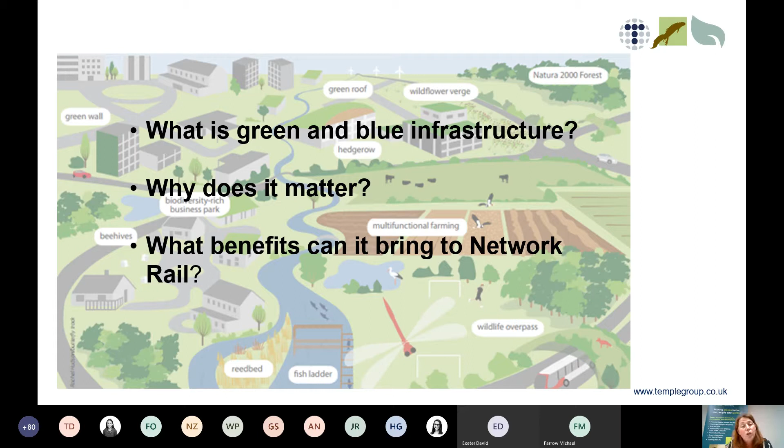So what is green and blue infrastructure? When most people think of green and blue infrastructure, they probably think of green roofs or green walls like this one at Birmingham New Street Station. And they're great, but they're not the whole picture. Green and blue infrastructure does include natural places such as parks, woodlands and rivers, and also man-made aspects of the environment, canals, water treatment facilities, green roofs and green bridges and things like that as well. It's all of these things together.

But it has to be said that green infrastructure is not simply an alternative description for conventional open space. The real kicker for it is that it's a network of multifunctional green and blue spaces and features that deliver environmental and quality of life benefits for communities. And that's the ultimate key point, and that's where I actually find the concept really exciting, is in that it's multifunctional and it's not just focusing on one thing. You might be expecting to hear me talk a lot about biodiversity today. I'm not going to, because it's that multifunctional aspect that crosses over everything and every aspect of life and our environment that makes it so important.

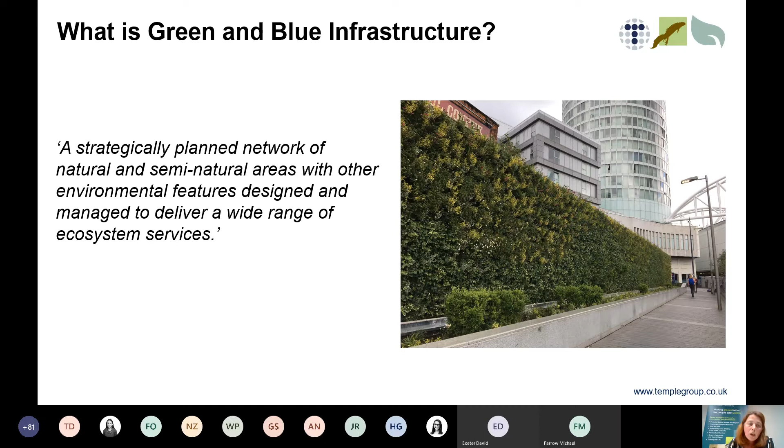So where does green and blue infrastructure fit within the scope of biodiversity as a whole? A lot of these concepts you'll have heard a bit about in the last 2 days, and I know you've got talks on biodiversity net gain, and ecosystem services and natural capital coming up. Those talks tomorrow and on Friday will delve into this in a lot more detail. But I think it's important that we talk about how green and blue infrastructure can support these ideals.

As we touched on the definition in the previous slide, green and blue infrastructure involves creating and managing habitats to support natural processes. It should be aligned with and support and enhance those processes. Now, if we look at the top of the triangle here, ecosystem services are basically the benefits that are derived from those natural processes. And when we're trying to look at how we quantify those benefits, it's very difficult to come up with ways of necessarily quantifying some of the benefits that we gain from the natural world. We know that all of these things, from pollination and food supplies, all take part in it, but how do we quantify that?

And that's where natural capital comes in. Natural capital is that framework for recognising and valuing the natural processes so that their importance to the economy and society is recognised and can be quantified and brought into basically your spreadsheet at the end of the day. Where do they fit? What benefits? Can we actually put a number on this? Natural capital enables the benefits of green and blue infrastructure and ecosystem services to be quantified and therefore assessed during your decision-making process. That's what allows us to actually take forward green and blue infrastructure and incorporate them into your KPIs or your sustainable development principles and see how it can help you achieve your targets as a whole.

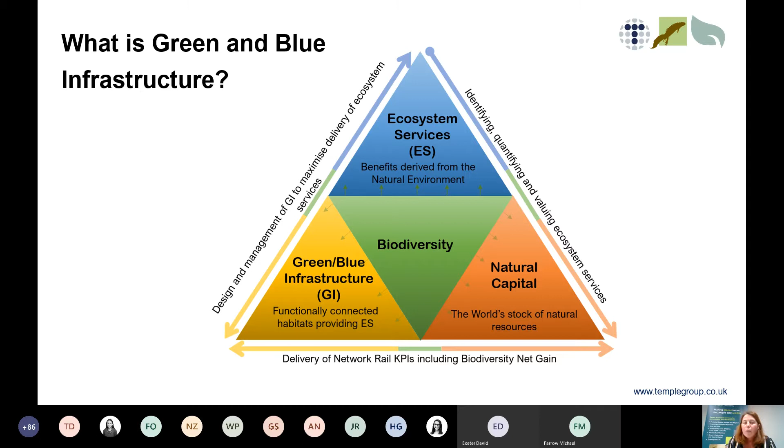So why is green and blue infrastructure really important in our schemes? As we've touched on, the definition of green and blue infrastructure states that it must be multifunctional, and therefore it can be integrated to anything to provide benefits. These benefits are really wide-ranging. They can be health and well-being. They can provide improvements to quality of life and community engagement. They can be biodiversity. They can provide additional habitat spaces.

They can provide green corridors to move through the environment as a whole. They can also provide landscape improvements, such as improving the quality of place. They can reduce the impacts of flood events and things like that. They can also be really important for economic growth. Nice places can increase land values, and therefore there can be monetary realizations through this. And there's also huge gains to be made in climate change through heat amelioration and air quality and noise improvements that can really change the way that people live.

This slide and this photo is taken from the Kunshan Cultural Plaza in China. China has a number of cities known as sponge cities, which is a great name for what they are. They're areas that have real problems with flooding due to the monsoon rains. The entire city's urban area has been designed with permeable surfaces and these green and blue infrastructure areas that slow down, absorb and treat the water and the stormwater, and then provide clean, dry and safe roads and urban areas for people to be in.

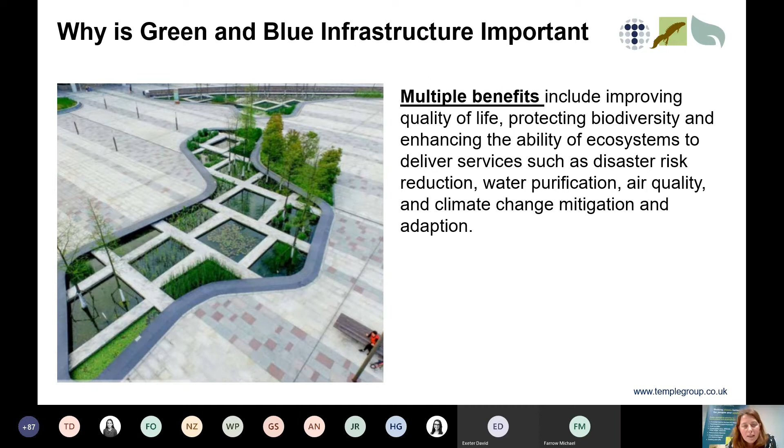It cleans the water, so there's really good water quality in the area. And they're really functional, attractive spaces for people to spend time in. That's sort of an idea of the multifunctional aspects that green and blue infrastructure can bring to you.

Carrying on with that surface water management example that we touched on with the sponge cities, this slide shows how there is an entire range through grey and green infrastructure that can be accessed, and really it's a case of using items across that spectrum to provide the best possible outcomes. Taking a little bit and combining them, we can improve function and resilience.

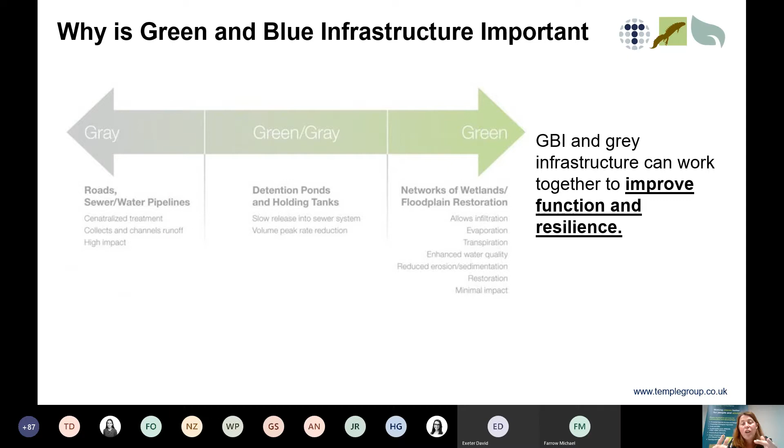Green and blue infrastructure, though, it's not about small scale installations, and it shouldn't just be those little bits at the end to close out problems that might be outstanding. We really want to centre green and blue infrastructure on a large landscape level, and that's really where it can show the best possible options for multifunctional approaches, interlinked, and really responding to the local need through any number of interventions, all layered on top of each other and providing real benefits to everyone.

And these landscape scale interventions are things that Network Rail, I'm not teaching you to suck eggs, we're already doing it as part of the HS2 Green Corridor. We're maximising those opportunities through the design and maintenance of green and blue features across the wider landscape. We're not just looking within that small area where you're actually going to build a railway. We're looking wide out at all the stakeholders, all the communities that could be impacted by this.

And trying to actually drive value through these changes that are made at a wider area. We are past the days where it was a simple like-for-like replacement strategy that we were making and everything would be contained within the one area. Blue and green infrastructure as a whole provides a mechanism by which multiple ecosystem services can be provided through that careful planning and looking at the big picture.

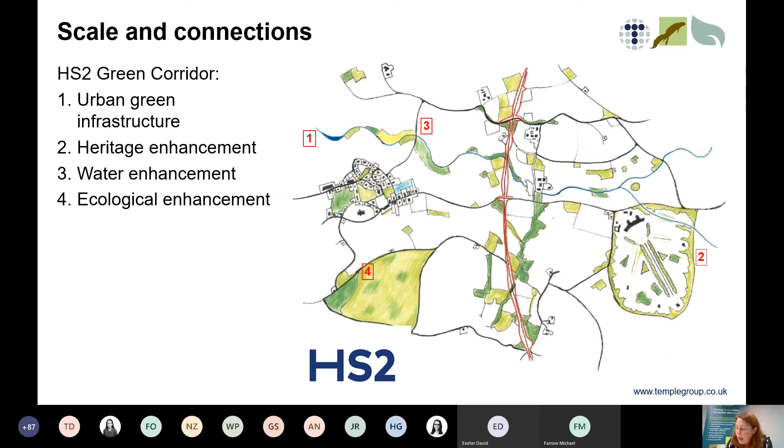So as I touched on, how I want to talk to you about green and blue infrastructure and what it can really do for you guys at Network Rail is by talking about your sustainable development strategy. I'm not going to go into it in any great detail. I would hope that those of you who need to know everything about it know everything about it, and those that maybe don't, if you're even interested in that sort of thing, maybe just go away and read about it.

But it's something that underpins the way that you work and identifies your priorities for sustainable and responsible business performance. And you've got a lot of targets that are in that and a lot of commitments which are admirable, and they cover a wide spectrum.

That includes your environmental responsibilities, which is something that's obviously very much in my wheelhouse, how you manage natural resources and how you manage your waste. It also covers your social responsibility, how you engage with the communities, how good a neighbour you are to the people that you work with, and how well you treat your staff, how well you treat the people that use the network.

And you also have environmental and socio-economic responsibilities, such as reducing energy and carbon usage, and looking forward at how you build resilience for the climate crisis, and how you can support Britain's wider economic development. And all of those boil down to some, as I say, some aims that you have.

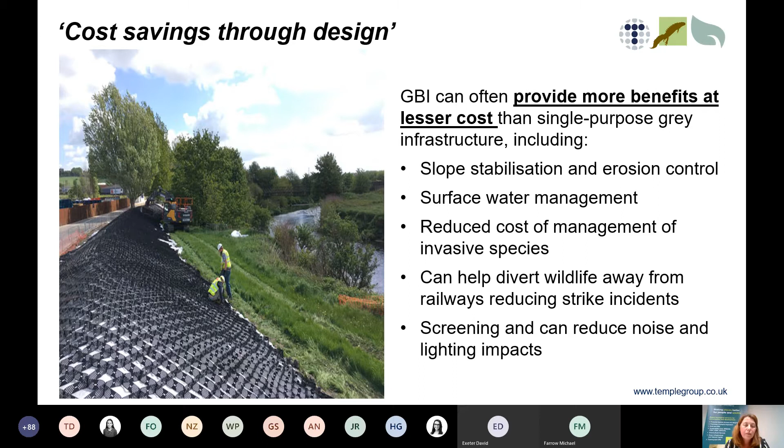One of your main targets drawn from the Sustainable Development Principles is a commitment to improving performance on adverse weather days. Green and blue infrastructure can provide resilience to that, as we've touched on already, and these interventions can either be a point of impact or source of impact.

Sustainable drainage, which can include swales and rain gardens and even green roofs and blue roofs - a newer concept - stores water. They can store rainwater locally and reduce flood risk. At the risk of stealing a term we've heard a lot recently, we're flattening the curve of the speed that water reaches your tracks and causes impact. By holding it back and slowing the speed it comes at you, you're stretching out the time you have to deal with it, lessening that impact.

Another major issue, moving away from water, are overly hot days, which are becoming more regular as part of the climate crisis. Hot days are a problem for offices, for people in train stations, and for heat-sensitive installations. Green roofs can provide cooling through evapotranspiration, and even single trees have been shown to provide cooling through shading. A 2007 study suggested that increasing the current area of green infrastructure in Manchester by only 10% would result in cooling across the area by 2.5 degrees under high emission scenarios - huge when dealing with the potential for more extremely hot days.

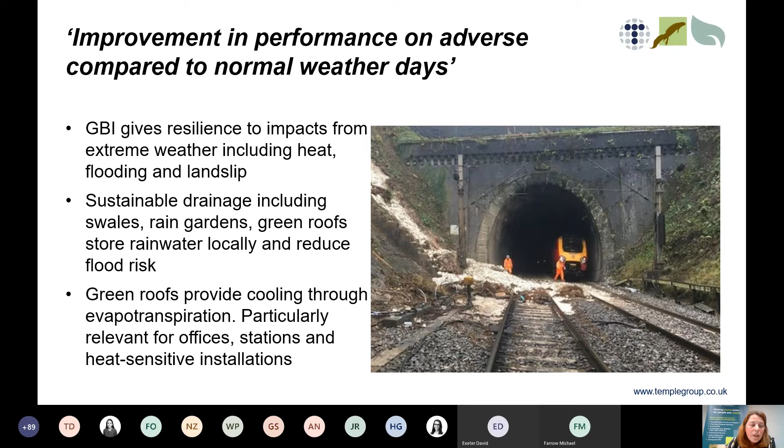Another area you have targets on is delivering social value to local communities - this is your 'being a good neighbour' target. This is a photograph or artistic rendering of the Kaohsiung Metropolitan Area Railway Station, currently under construction and due to be completed in 2025. It's an absolutely phenomenal looking green space, designed with little pockets of planting for biodiversity and areas that the community and railway users can actually get out onto. It's providing an additional park whilst the train station is combined within.

Green space is good for people. It sounds trite, I know, but it's scientifically proven across many studies. Living closer to parks and recreational leisure facilities is statistically associated with increased physical activity, and that activity within green environments provides better psychological and physiological returns than exercising in grey spaces - it actually makes it better for you. The more often a person visits urban green spaces, the less often they experience stress-related illnesses. So providing that on your doorstep, in your workspaces, can be huge for people's mental and physical health.

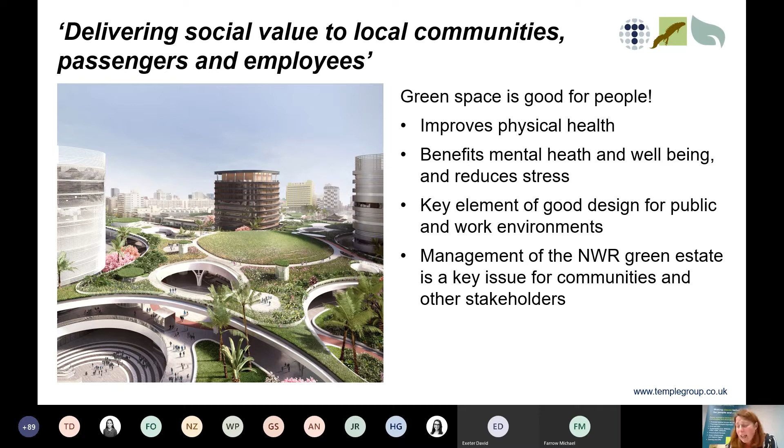Some of the more hardline targets that you have are based around your reduction of carbon emissions and your energy use. And they are quite challenging, and they're quite exciting for me to see that they're so challenging.

You've got a lot of land. Network Rail owns a lot of land, about 30,000 hectares all told. That could be a huge place for reducing the atmospheric concentration of carbon by locking it up through your earthworks, through your soil, through the plants that you use. All of these take carbon dioxide from the air and hold it in the plants. You'll hopefully be aware of why that's a massive issue with the deforestation of the rainforest and the like, and that's where a lot of carbon storage has gone from. So redressing that balance is very important.

Trees can lock up about 7 kilograms of carbon per square metre, and that will take about 25 kilos of carbon dioxide out of the air per year. Grass is a bit less, about 5.5 kilos per square metre, taking about 20 kilos of carbon dioxide. So whilst you think of trees as being really powerful at this, grass is a massive driver as well. To put that into effect, you'd only need 40 square metres to offset a flight from London to Barcelona, which isn't a huge amount when you think about the amount of land that you have.

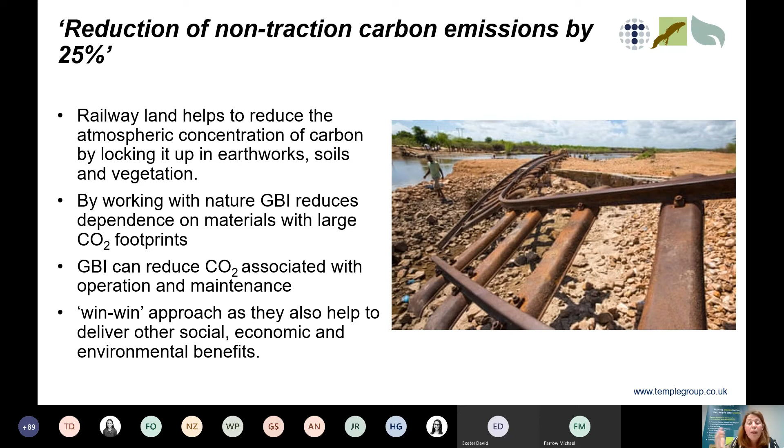So green infrastructure can provide lots of opportunities for additional planting as well. We don't have to look at the flat layer of your space because we can build up, having planting going upwards with green walls and the like, and even on top. That can provide a substantial contribution to climate change mitigation through carbon storage. And whilst it might feel limited, it's a really important contribution towards that mitigation. These natural interventions, done whilst addressing other issues, are increasingly being recognised as really desirable win-win approaches to combating climate change, because you're also providing all the social and economic benefits we've already touched upon. So it's that multifunctionality again, where instead of taking with one hand, we're giving with the other as well.

Reduction of energy usage - if we go back to your monetary baseline again, the costs of heating, central heating and air conditioning are massive for any business, ensuring that office spaces and workspaces are suitable for people to be in.

Urban areas, parks and tree-lined streets, as we've touched on, contribute massively to reducing an area's overall demand and the moderation of what's known as the urban heat island effect. We touched on that with the example about Manchester's green infrastructure earlier. Trees, green roofs and green infrastructure features can cool urban areas hugely. There's the shading effect, which means the sun isn't beating down. They can also deflect that radiation from the sun directly. But they also release moisture into the air, which as it evaporates has a cooling effect.

And that can have a huge monetary saving by not having your air conditioning running all the time, bearing in mind that buildings are responsible for about 40% of energy consumption and 36% of carbon dioxide emissions in the EU. There's a lot of power being used just to keep buildings adequately suitable. So all of this energy used to maintain internal building temperatures through heating in winter and cooling in summer can be reduced by the use of green infrastructure elements such as green roofs and green walls.

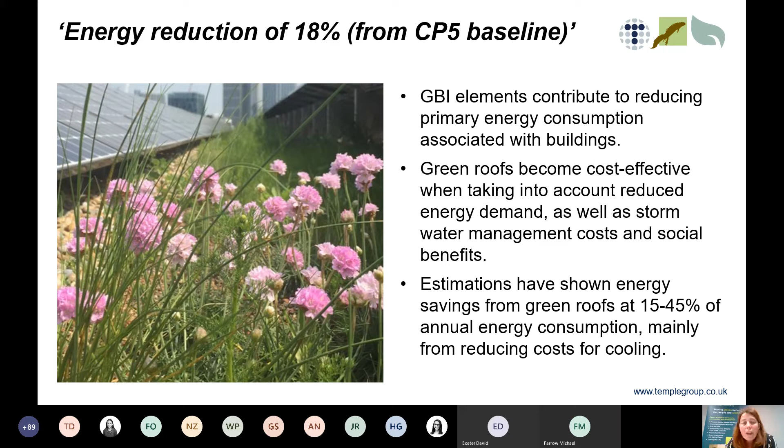Now, this is probably where the vast majority of people who've called into this were expecting me to spend a lot of my time, and I'm really not, because you're going to be hearing a lot about this over the next few days, and I've heard a bit about it already. It's how green and blue infrastructure really does underpin what we're doing for biodiversity.

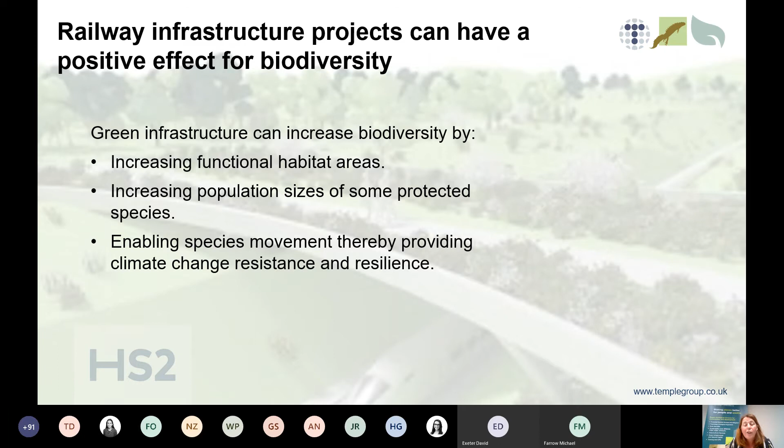Hopefully that's given you a primer on where we're at with our thinking on green and blue infrastructure. I want to press again the importance of not viewing it as a stopgap at the end of your project to close out outstanding environmental problems, but bringing environmental and ecology people to the table at design stage. That way we can take the solutions you want to implement and use them to solve a wider range of problems early on, to make Network Rail a forward-thinking organisation truly focused on making Britain a better place.